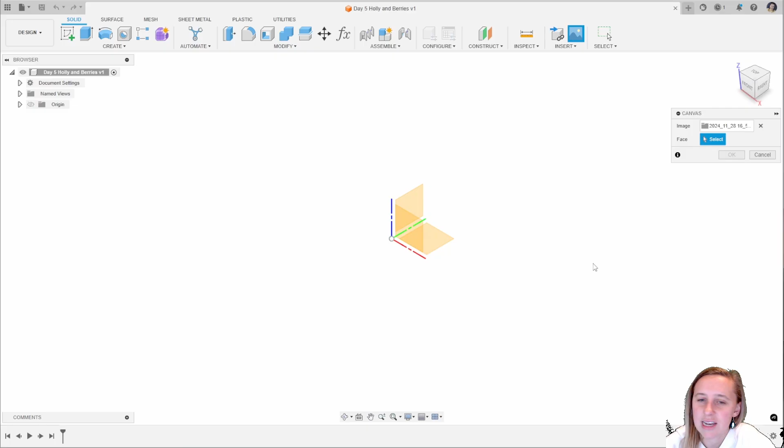So now that we're in Fusion, I'm actually going to use this little sketch that I created to help define the design that I want to do. So to use this, it's called a canvas and I can use it to help create my design. So I'm going to click Insert Canvas, Insert from my computer and select that sketch that I scanned in. I'm going to place that on the XY plane and then set that there.

Now what I want to do is make sure that this is the right size that I want to be working with. So in order to do that, you can right click and calibrate the canvas. Now I don't want these too big. The idea is to use them as sort of tabletop confetti. So I want the overall dimension to be less than 50 mil for this to work. And then I'm going to use this sketch to help me with my design.

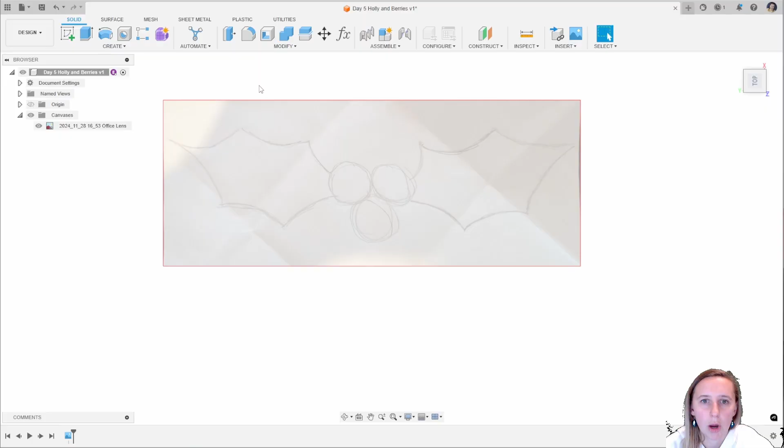This is going to be a 2-component design. So the first thing I need to do is create a new component. And this is going to be the holly. Now I could have placed the canvas within that if I wanted to. I can change the transparency of the canvas to make it a little bit easier to see.

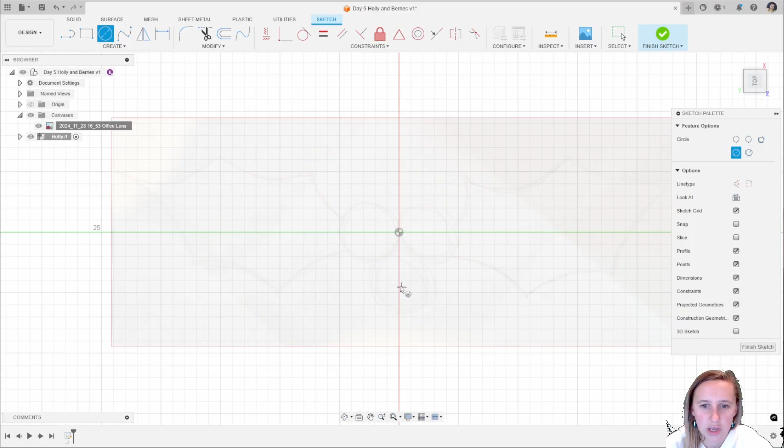Now creating a sketch on that plane, I can then use this sketch to help define the design that I want to do. So I'm going to start off with a few circles down here. So this is going to be 5 mil and then I'm going to offset that line by 0.8. So that's 2 extrusion widths wide.

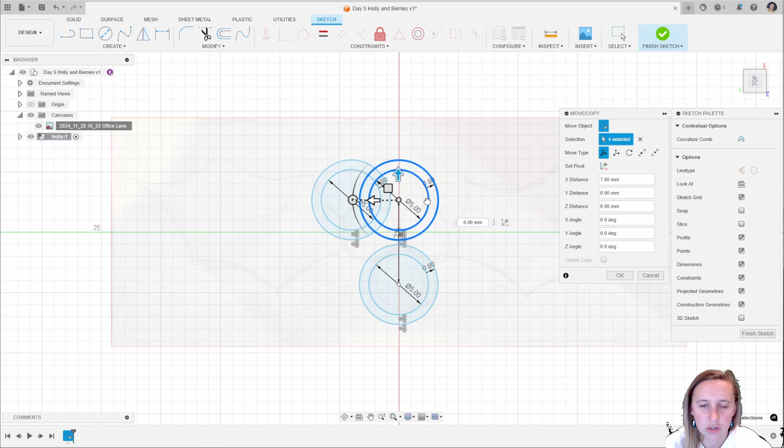And then I actually just want to copy that so I can copy and paste that bit of the sketch because I want 3 of them. So I can do that and I can paste again and just copy elements of my sketch there. And then what I want to do is to make all of these berries tangent to each other so that there's no gaps between them. And then I'm just going to move them around until they're in about the position I'd like them to be.

Now, I don't necessarily want this design to be fully symmetrical. I think it might look a little bit odd fully symmetrical, but I'm just moving them around until they're in about the position that I would like them to be for this sketch.

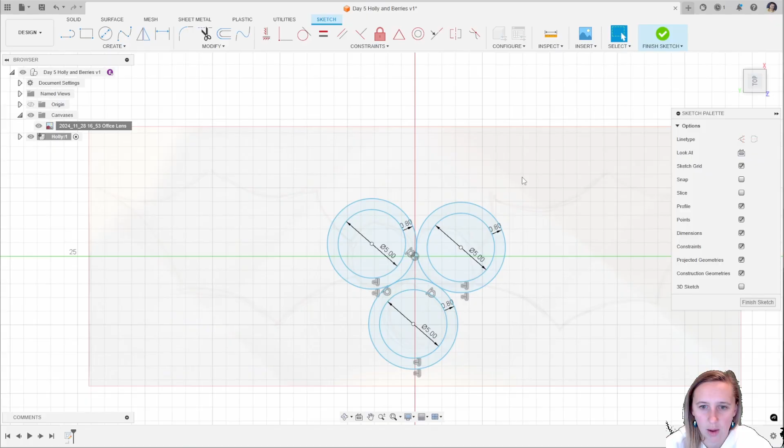I think I wanted a diameter of 2.5, not 5 mil. There we go. That looks better. Got my diameter and radius mixed up. There we go. That's matching my sketch. And this is where your sketches can really be useful for your designs.

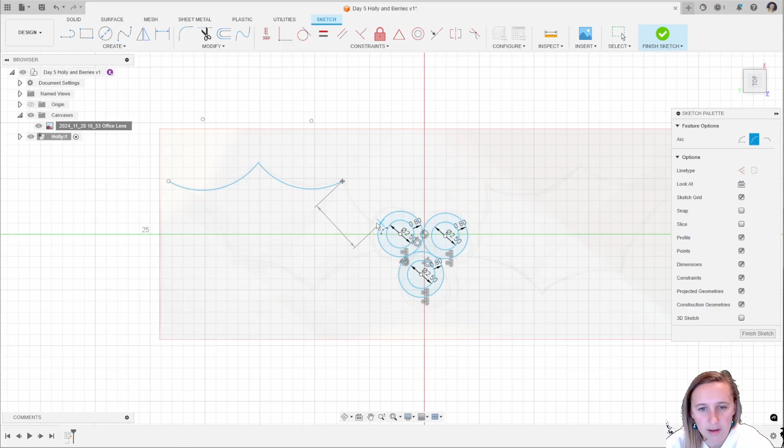Next thing I'm going to do is to use some arcs to help define the shape of the holly. So just clicking on these sort of points that I want to use in that sketch that I've drawn and bringing that into the circle there. Just bringing those in and creating the sketch. That is how I want it to look. And there we go. That's sort of looking a bit like a holly leaf.

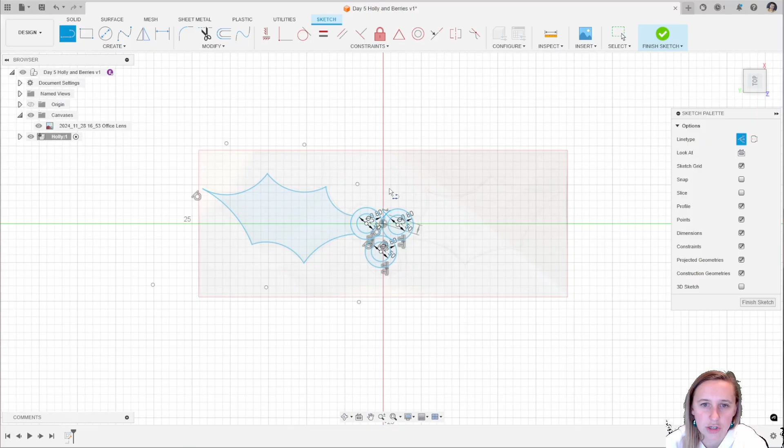Now, I could do the same on the other side, make it symmetrical, or you can add in a construction line. So clicking line, you can change the line type to construction, going from the origin to up. And then what I can do is use a mirror sketch.

So selecting those 6 lines here and mirroring them across that construction line that I've just created. You can see here that creates the same sketch on the other side of the model. I will just need to bring in those lines and extend them to make the model work there.

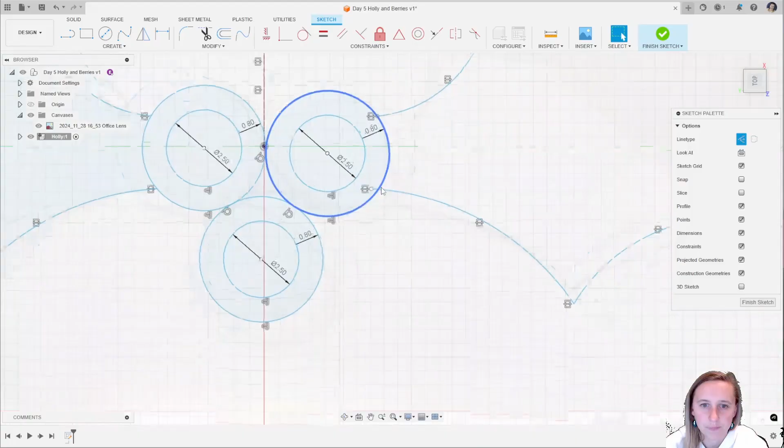So I can add a coincident to that line there and we've got that fully enclosed sketch. Now there's different debates about whether a sketch mirror or a solid mirror is the best option. In this case, because the berries weren't symmetrical, a sketch mirror worked for me because that means I can just edit that design as needed on the opposite side.

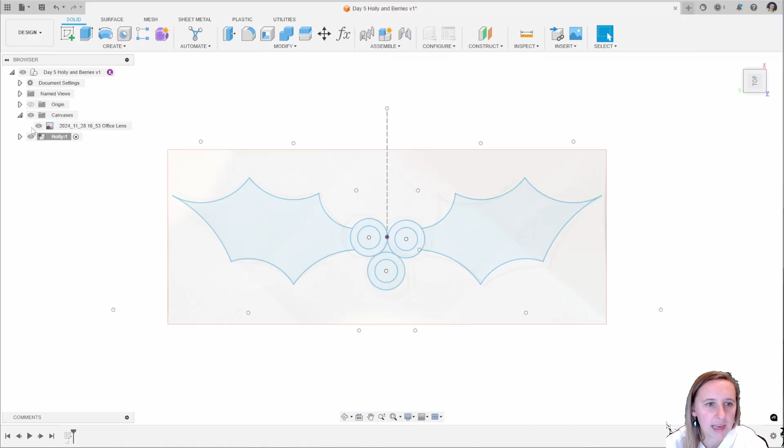So now that I've got that sketch based on my canvas, I can hide my canvas and start working to create this into a 3D model. So starting off with an extrude, I want to extrude the 2 leaves 2 millimeters. So that's my starting point. I'm then going to view my sketch again, and I'm going to extrude these 3 outer rims by 1.8 millimeters, bringing those up there.

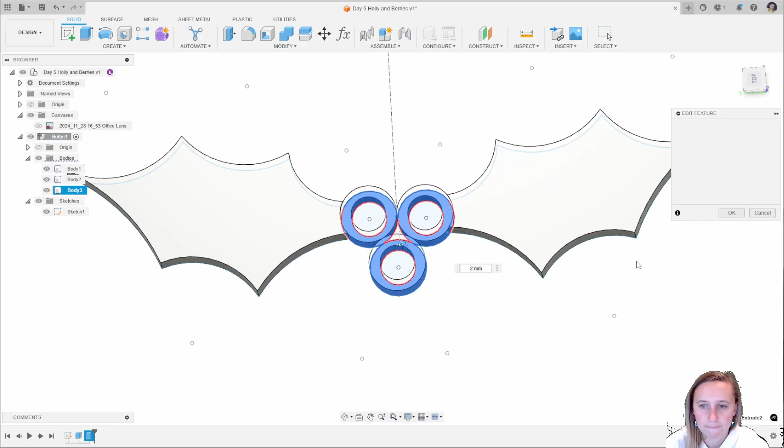And I want those to join rather than new body. So there we go. So they're part of the same body as the leaves. I'm now going to go back to the top level component, activate that component, and then create a new component. Now this is for the berries, because I want these to be a different component for my 3D printing.

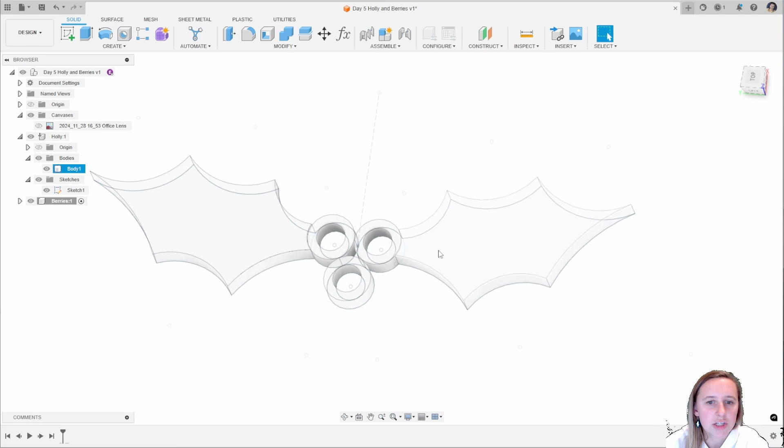So this one, I'm going to use the same sketch that we created before and create a sketch on the bottom plane of the model. So creating that sketch, I'm going to project through. So P on the keyboard is the shortcut for project, and project through those outlines so that I can use them in this component. And then going to hide that component such that I can work with this one here.

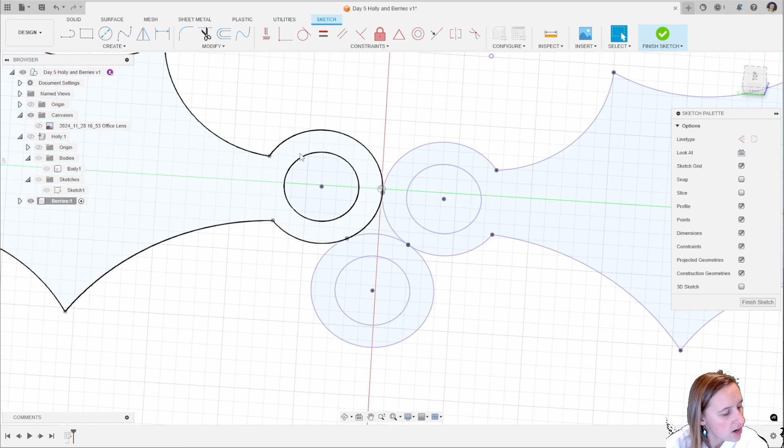Now I'm going to do another circle offset inwards from these ones. So I want that to be offset by minus 0.2 millimeters, just to give us a little bit of clearance. So now that I have that, I'm going to extrude that profile, and I'm going to extrude this up to the top of this part here. So I want my distance to be to object.

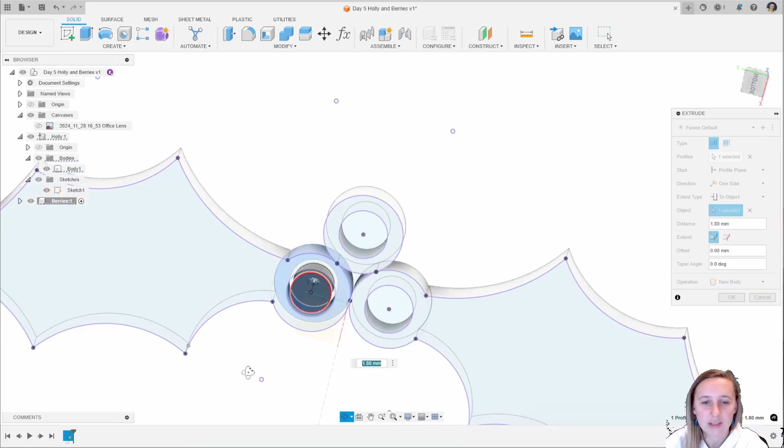However, I want it from a little recessed part from the bottom of this. So my starting profile, I'm going to do an offset from the bottom, and my offset is going to be 0.1 millimeters upwards, which gives us an offset from there up to the top object there. And that gives us the first section of the berry that I need.

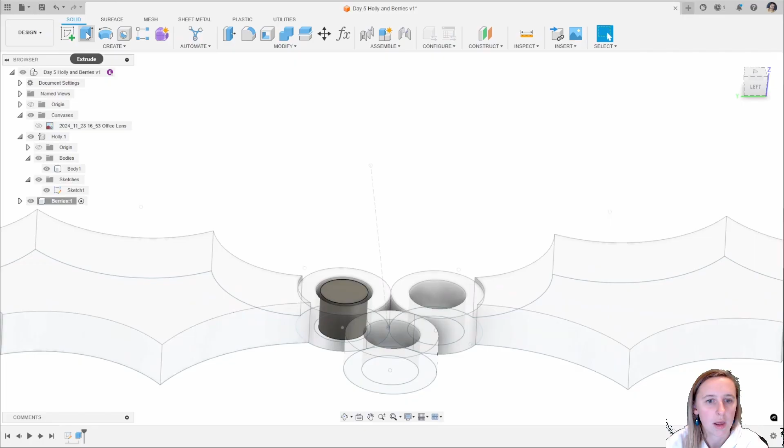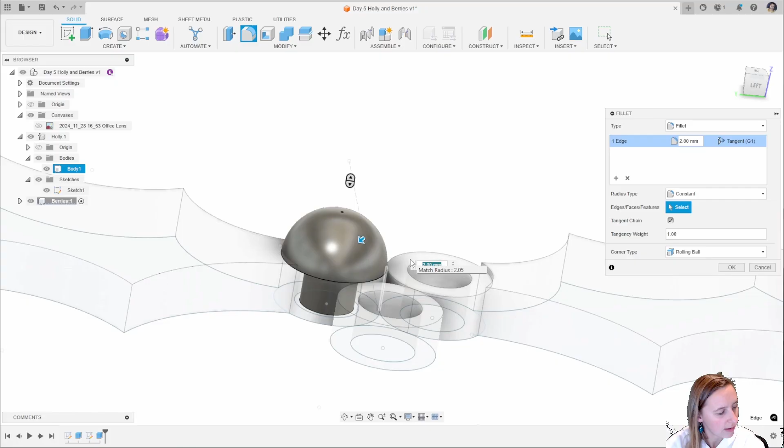I'm then going to create a sketch on the top surface there, project through that outer line here, and finish my sketch. And then I'm going to extrude all of these profiles up by 2 millimeters. I sort of got this little peg in the hole there. I'm then going to add a fillet to this to round it off. So I want that fillet to be 2 millimeters. Or you could go a little bit smaller maybe. Depends on how round you want the berries, or if you want them to have a slight flat there.

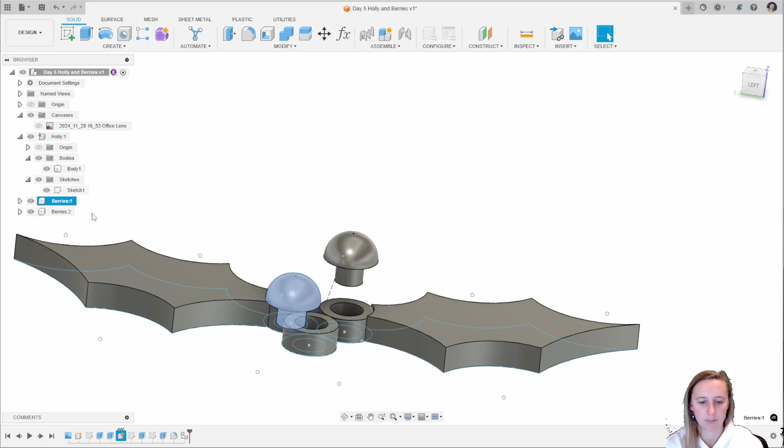And then what I'm going to do is activate my top level component and actually copy this component. So you can just use Control and V, and you can position that. I'll just position it out of the part so you can see what I'm going to do. And again, selecting berries part 1, Control and V, and position that up here.

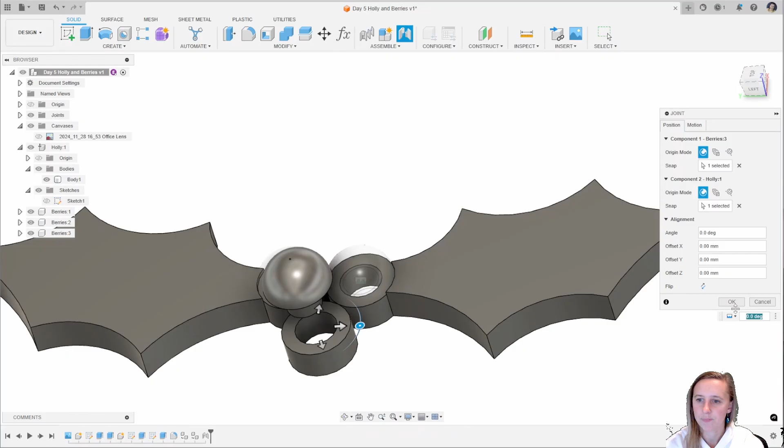I'm then going to add in some joints, so assemble and joint. I'm going to grab that top part there, bring that down to here and click OK. And the same with this one here. So grab the top part there and bring that down here. Now I think for the design, it might be good to have a little chamfer to help sit those in.

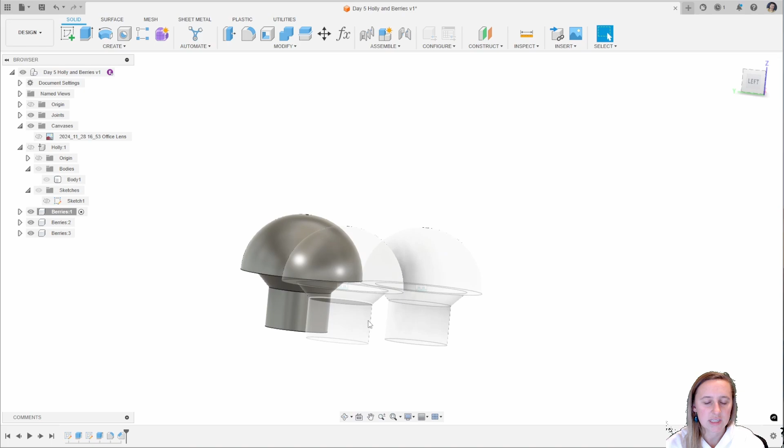So I'm going to go back to the berries one, hiding the holly, and add a small chamfer on this here. So I want that to have a chamfer of 0.5 millimeters there. And that's going to sit in the top of the holly. So I need to add a corresponding chamfer to the holly as well.

So activating the holly, I'm going to hide the berries. And then what I'm going to do is add in a similar chamfer to these surfaces here. So that chamfer is going to be 0.4 millimeters.

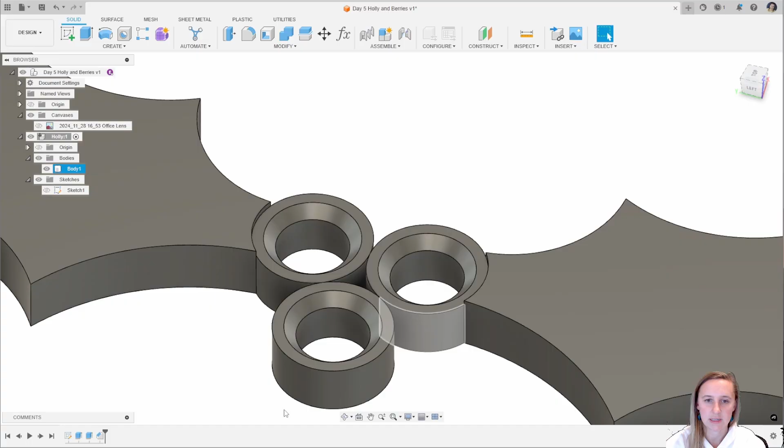And let's have a look and see how that looks with all of our components viewable. We've lost the joint. That's because I will need to redo that joint. So if I edit the joint, and actually I'll just delete those joints, because I want to do the joint after the chamfer.

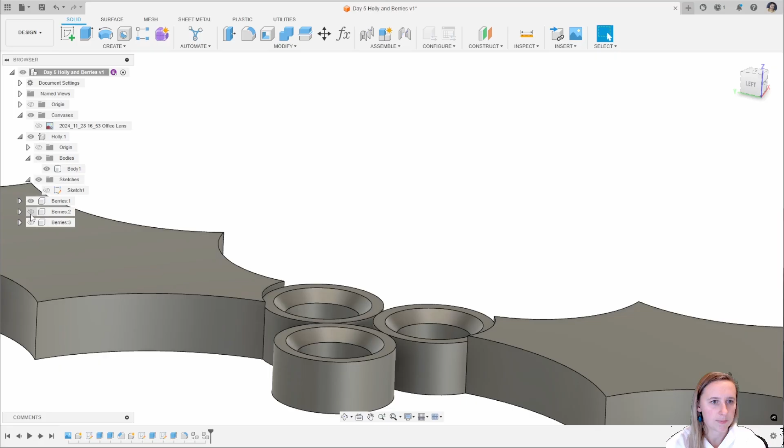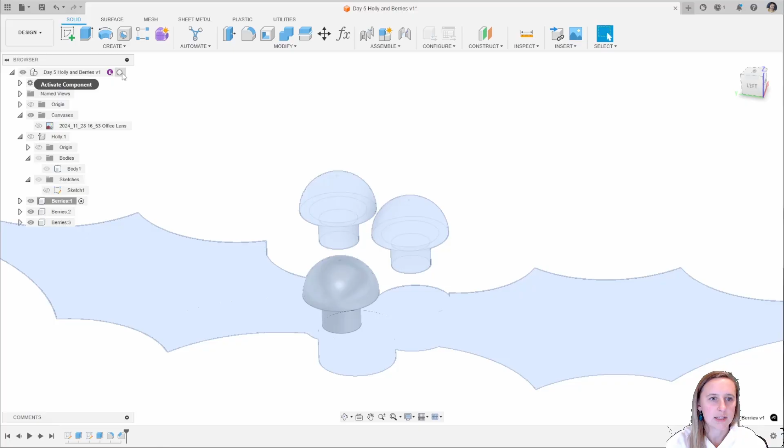So what I'm going to do is activate the berries, add that chamfer back in. So that is on here, and that's going to be a chamfer of 0.5. And you can see that copies through to the copies of that component there. Go back to the top level component and I can add in those joints there.

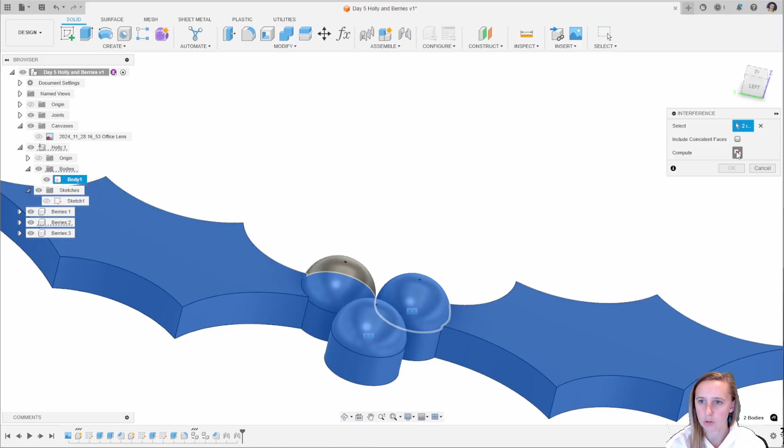So I want to joint that to the top of there. And the same, I want to add that top joint to the top of there. I'm just going to check for interference. I'm not sure if I've quite got my model perfectly right. Nope, so that's okay. And we can see that we've got our holly and berries sitting inside those locations there.

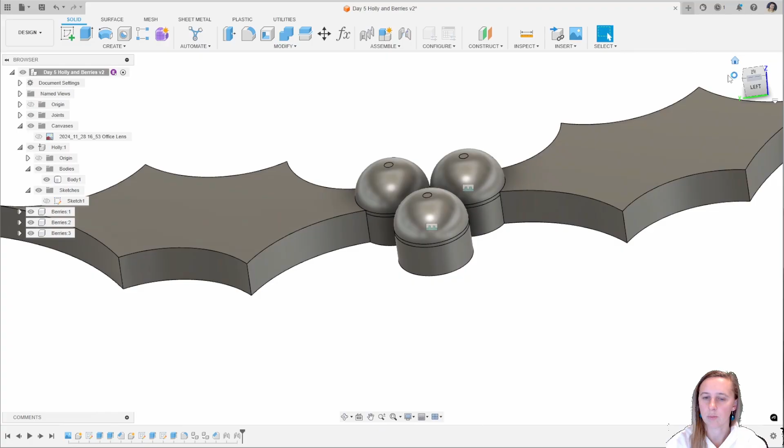I think I want this fillet to be slightly less severe, so I'm just going to edit that back in, and I think I'm going to do 1.8 just to give it sort of a flatter look on the top there. I think that looks a little bit better. I also need to add a chamfer to the edge of the holly.

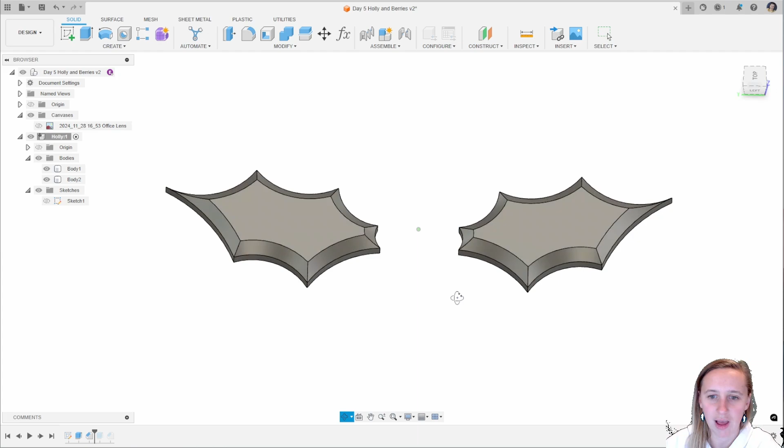I'm going to go back in and edit the holly design. I'm just going to roll that back before I extruded these parts and add in a chamfer to give it a little bit more of an effect. So I'm just going to grab those top two surfaces and I'm going to add a 1mm chamfer to that. Much prefer how that looks in terms of looking like a holly leaf.

And then all you need to do is roll that timeline forward and the design is updated to reflect those changes back down the line. So rolling my timeline all the way forward, we've got our holly and berries in there. And there we go. That is the design.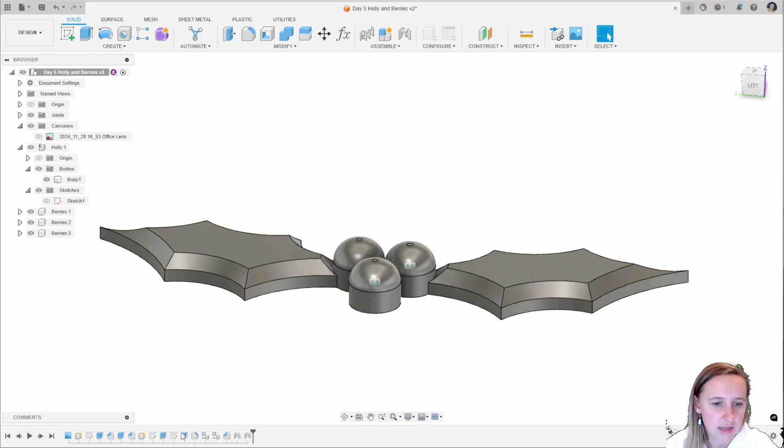If you're not happy with how this looks, you could edit the extrusions you did on the berries and just reduce those slightly. So instead of 2.2mm, you could just drop them to 1.8 and you can edit those fillets to be 1.5. Gives a sort of rounder, flatter look to the berries, depending on what you're going for with your design.

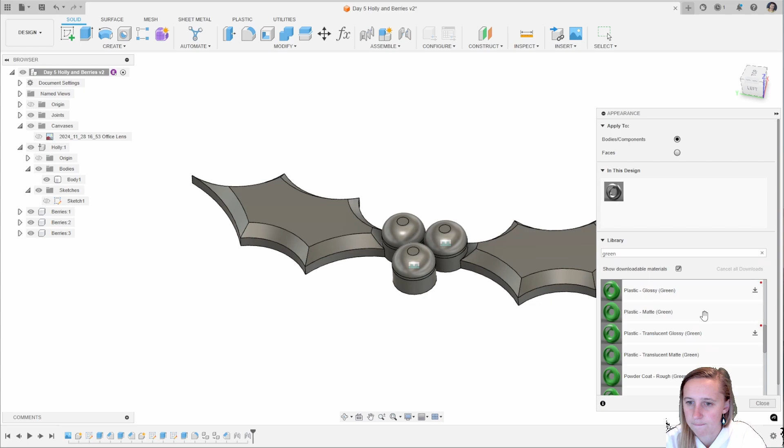And then when you print these, you will print the holly on its own, and then you can print the berries, 3 copies of it, and slot them in. So let's add some appearances and see how that looks with some red and green. So I want a nice green for the holly leaves. So I'm going to choose a plastic matte green for that.

And then I want a red for the berries. So I'm going to choose a red for the berries and add those to those components. You only need to add it to 1 because it's a copy of the component. And there we have it. A small reusable table topper.

All that's left to do now is export your files as an STL, load them up into the printer in whatever color you want to print them in, and then you can 3D print multiple copies of these and scatter them across your table for Christmas Day.